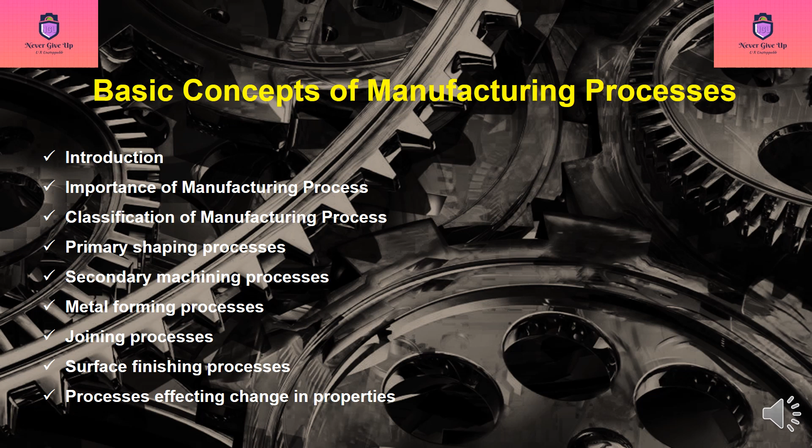Basic concepts of manufacturing processes. Manufacturing is basically a value addition process. It is the backbone of any industrialized nation.

Definition. Manufacturing is the process of conversion of a raw material of low utility and almost no value because of having no particular dimensions, shape, size characteristics into a product of high utility and value because of having appropriate size, shape, feature, configuration, dimensional accuracies and finish. So, manufacturing is nothing but converting raw material into products by using certain manufacturing techniques.

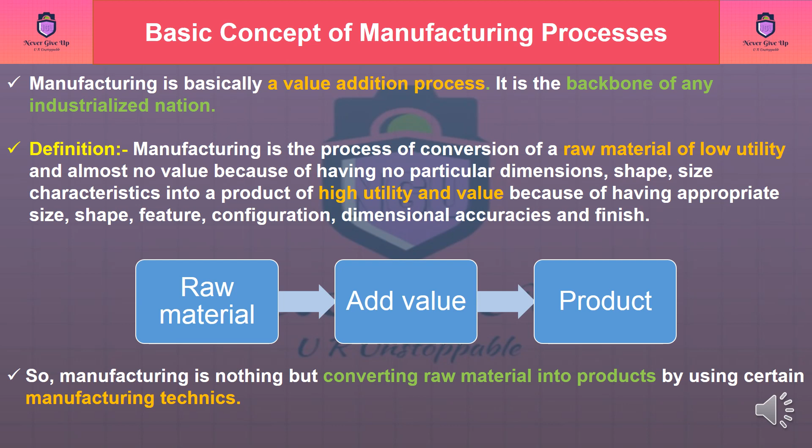Importance of manufacturing process. Manufacturing and technology are complementary to each other. Growth in manufacturing enables increased availability of finished goods and its appliance in various sectors. Such appliance leads to technology development of the industries, which is then transferred to development of manufacturing technology.

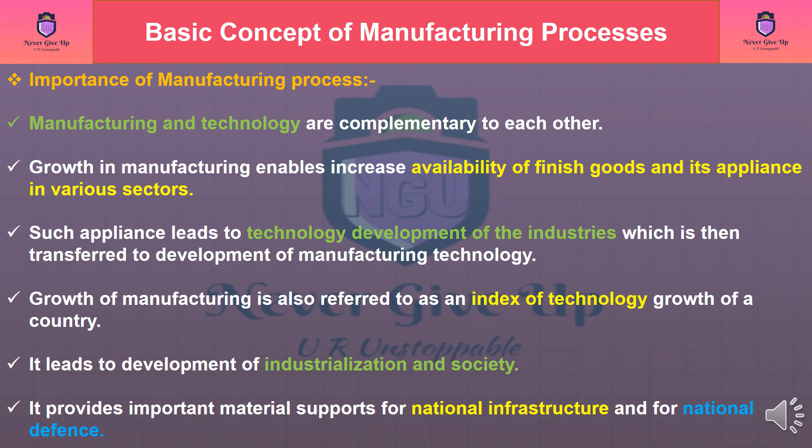Growth of manufacturing is also referred to as an index of technology growth of a country. It leads to development of industrialization and society. It provides important material supports for national infrastructure and for national defense.

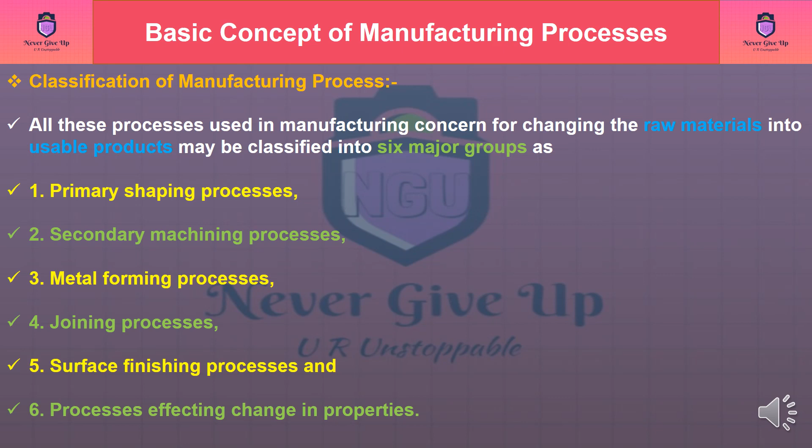Classification of manufacturing process. All these processes used in manufacturing concern for changing the raw materials into usable products may be classified into 6 major groups as: 1. Primary shaping processes. 2. Secondary machining processes. 3. Metal forming processes. 4. Joining processes. 5. Surface finishing processes and 6. Processes effecting change in properties.

1. Primary shaping processes. Primary shaping processes are manufacturing of a product from an amorphous material. Some processes produce finished products or articles into its usual form, whereas others do not, and require further working to finish component to the desired shape and size.

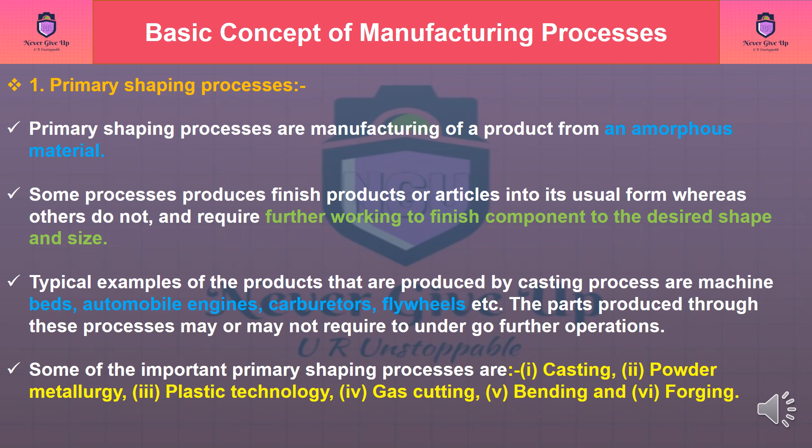Typical examples of the products that are produced by casting process are machine beds, automobile engines, carburetors, flywheels, etc. The parts produced through these processes may or may not require to undergo further operations. Some of the important primary shaping processes are casting, powder metallurgy, plastic technology, gas cutting, bending and forging.

2. Secondary machining processes. As large number of components require further processing after the primary processes, these components are subjected to one or more number of machining operations in machine shops, to obtain the desired shape and dimensional accuracy on flat and cylindrical jobs. Thus, the jobs undergoing these operations are the roughly finished products received through primary shaping processes.

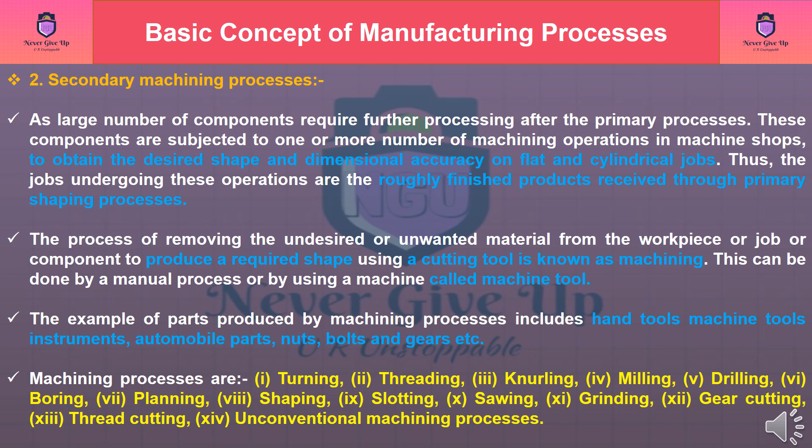The process of removing the undesired or unwanted material from the workpiece or job or component to produce a required shape using a cutting tool is known as machining. This can be done by a manual process or by using a machine called machine tool. The example of parts produced by machining processes includes hand tools, machine tools, instruments, automobile parts, nuts, bolts and gears, etc. Machining processes are turning, threading, knurling, milling, drilling, boring, planing, shaping, slotting, sawing, grinding, gear cutting, thread cutting, and unconventional machining processes.

3. Metal forming processes. Forming processes encompass a wide variety of techniques, which make use of suitable force, pressure or stresses, like compression, tension and shear or their combination to cause permanent deformation of the raw material to impart the required shape. These processes are also known as mechanical working processes and are mainly classified into 2 major categories, i.e., hot working processes and cold working processes.

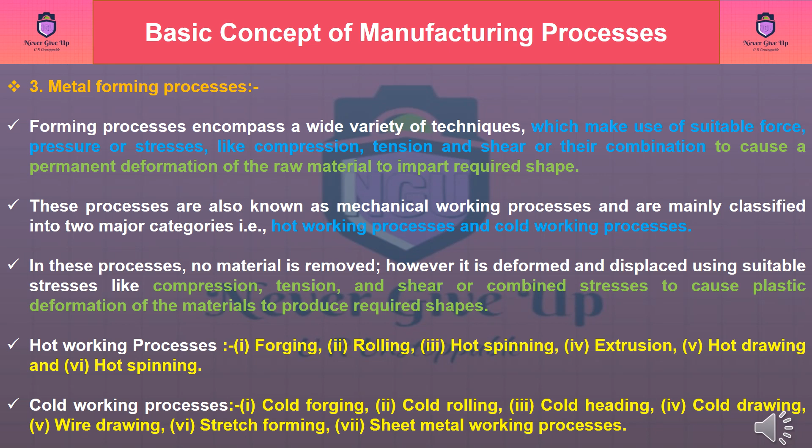In these processes, no material is removed, however it is deformed and displaced using suitable stresses like compression, tension, and shear or combined stresses to cause plastic deformation of the materials to produce required shapes. Hot working processes: forging, rolling, hot spinning, extrusion, and hot drawing. Cold working processes: cold forging, cold rolling, cold heading, cold drawing, wire drawing, stretch forming, sheet metal working processes such as piercing, punching, coining, squeezing, deep drawing, bending, etc.

4. Joining processes. These processes are used for assembling metal parts and in general fabrication work. Such requirements usually occur when several pieces are to be joined together to fabricate a desired structure of products. These processes are used for developing steam or watertight joints. Temporary, semi-permanent or permanent type of fastening to make a good joint is generally created by these processes.

Joining processes are welding, plastic or fusion, brazing, soldering, riveting, screwing, press fitting, sintering, adhesive bonding, shrink fitting, diffusion welding, etc.

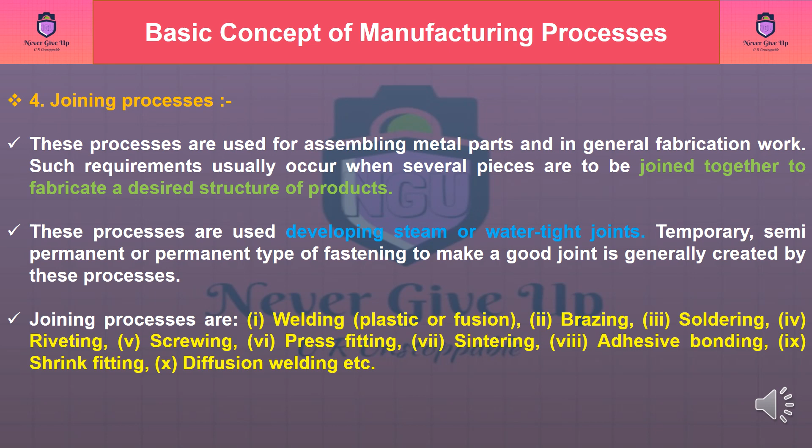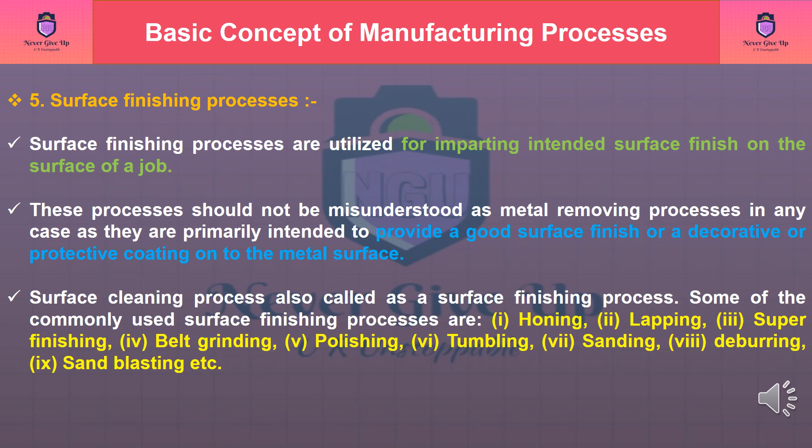5. Surface finishing processes. Surface finishing processes are utilized for imparting intended surface finish on the surface of a job. These processes should not be misunderstood as metal removing processes in any case, as they are primarily intended to provide a good surface finish or a decorative or protective coating onto the metal surface. Surface cleaning process is also called a surface finishing process. Some of the commonly used surface finishing processes are honing, lapping, super finishing, belt grinding, polishing, tumbling, sanding, deburring, sandblasting, etc.

6. Processes effecting change in properties. Processes effecting change in properties are generally employed to provide certain specific properties to the metal workpieces for making them suitable for particular operations or use. Some important material properties like hardening, softening, and grain refinement are needed to jobs and hence are imparted by heat treatment.

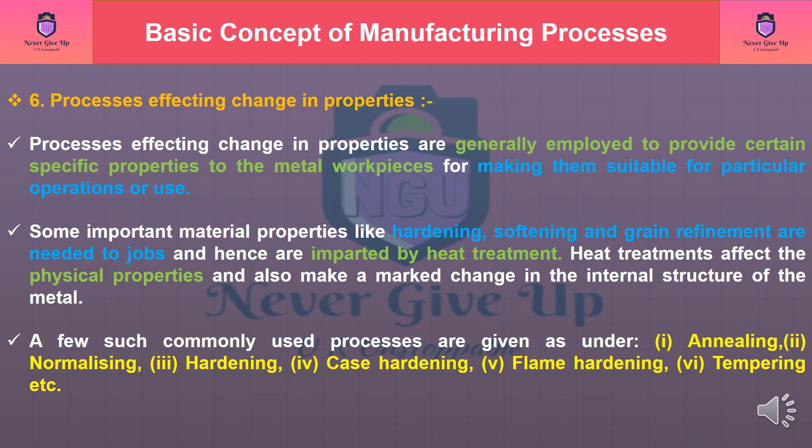Heat treatments affect the physical properties and also make a marked change in the internal structure of the metal. A few such commonly used processes are given as under: annealing, normalizing, hardening, case hardening, flame hardening, tempering, etc.